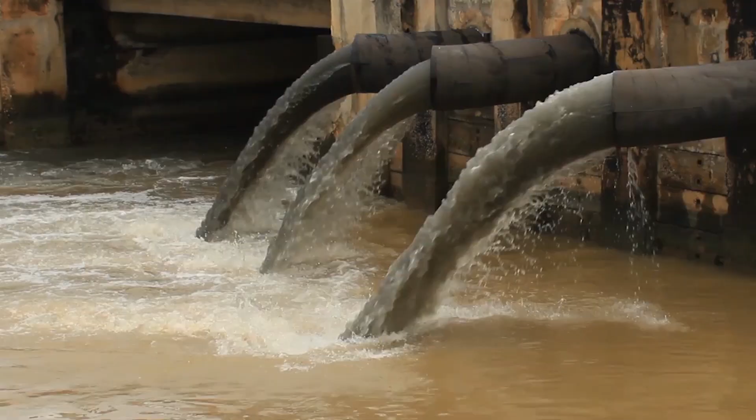Actually, I come here with some questions for you more than answers. So the reason I'm here is to ask you a few questions. The European Union is requesting many industries to measure. And actually, the goal is that they should measure in the same way, mainly because of three different

reasons. One of the reasons is because there is the emission limit value. And of course, when you measure, you want to know if the process is fulfilling the emission limit value. The second reason is that emission concentration at different times on the same site should be the same. Let's say, if I am in a process and I'm measuring 60 today, in 3 weeks, when the emission is exactly the same, the system should measure 60 as well.

And the third reason is that the emission concentration at different sites, meaning that if a plant here in Barcelona is measuring 60, and then an equal plant in Germany or in the UK or in any other place has the same emission level, it should measure 60. And my question to you is: is this goal always achieved?

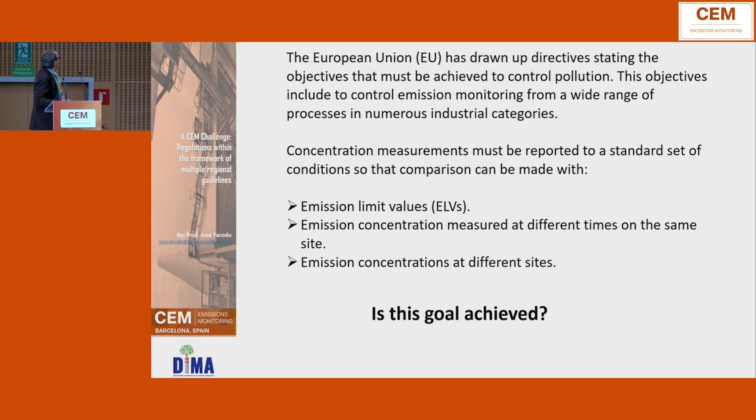Then, there are 27 CEN members, and they all have to fulfill and comply with the standards and with the directives in the same way. Do you think they do? Do you think all of them understand the standards and the directives in the same way? Do you think that a plant measuring in Barcelona, a plant measuring in the UK, and a plant measuring in Germany will measure just the same or similar?

In Spain, there are 17 autonomous communities. Do they all understand the standards in the same way? Do they use the same technical answers to measure?

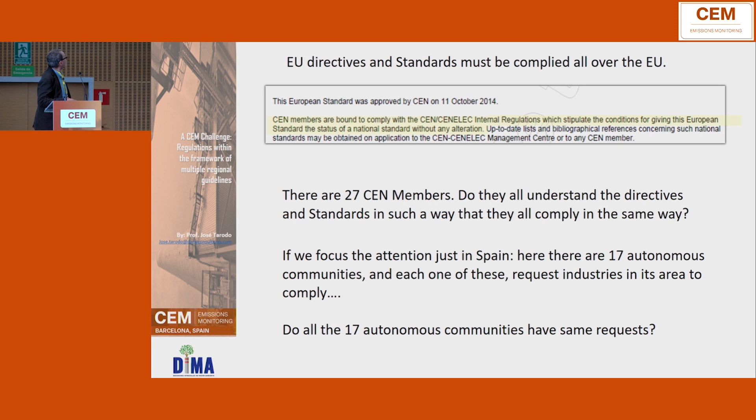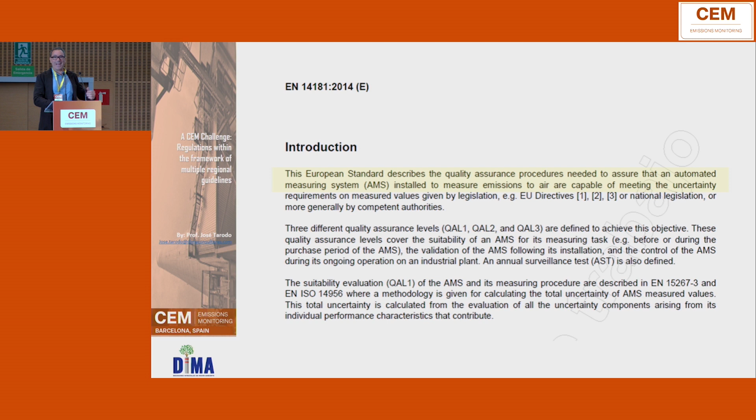Then, if we come to the EN 14181, you know there are these 3 quality assurance levels, and to me, this is a very good standard. Now, there are still open questions. And there are many guidance documents, many of them. I have here pictures of a few of these documents, but there are many more. And these documents don't always use the same answers. They don't always say the same. So if you check these documents, sometimes they tell you different solutions for the same questions.

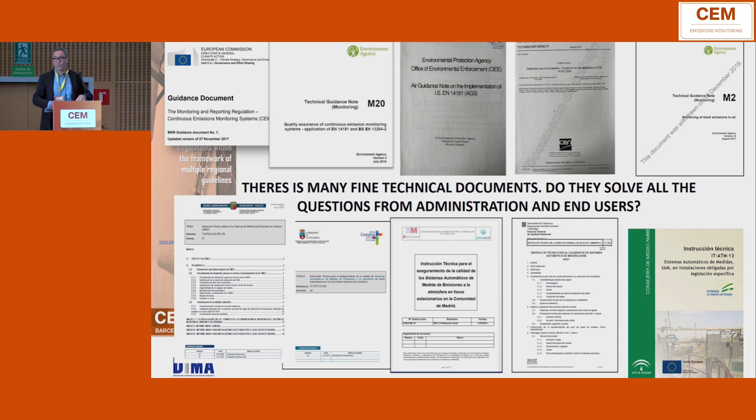A few words about me and why I'm here talking about this. I started almost 30 years ago as a project manager, doing CEM design and installations all over the world. Then 24 years ago, I started to work in a different company, DIMA Consultores, where I'm working today. My main jobs are usually design, integration, maintenance of CEM systems, and auditing, visiting plants, checking the CEM systems and telling the customer, sometimes the administration and sometimes the plant, if they fulfill, if they measure correctly, or answering their questions. And of course, I'm teaching in different engineering schools and master degrees. So this is a little bit my experience.

After visiting so many different plants, after checking the systems in so many different plants, I can see many differences between the way they measure in some places and the way they measure in other places. And since this is a 15 minutes time, I will tell you a few of them, but there are so many.

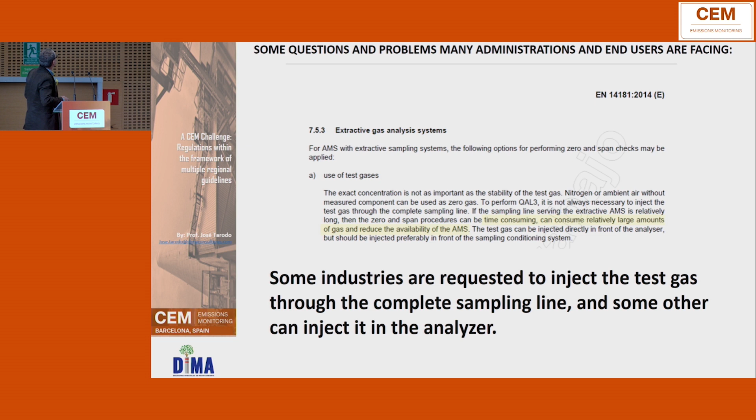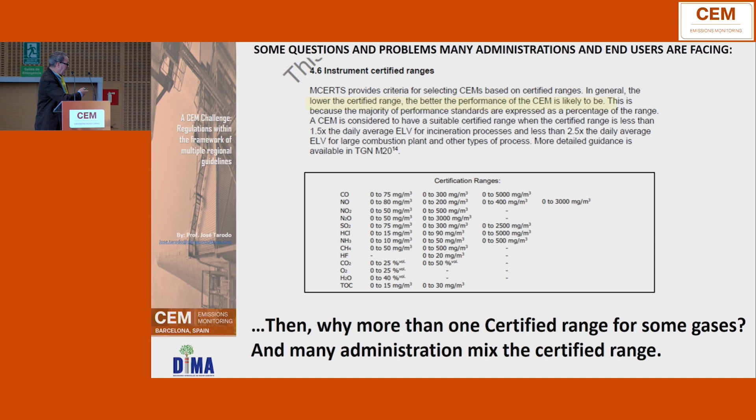Then, when we talk about the certified range, we usually say that the lower the certified range, the better the performance of the CEM. Then, why are there so many different certified ranges in the QAL1? Some customers have a lot of questions about this, and many administrations say that your emission limit value should have the certified range in the QAL1, which is totally wrong. But sometimes this happens. So many people wonder and ask about this.

Then, when we measure, we discount the uncertainty. But how to do it? Many people do it in many different ways, so there is not one way for everybody. Some people discount the uncertainty that they estimated in the QAL2. Some people discount the uncertainty that was estimated in the QAL1. Some people don't discount anything at all. An administration tells do not discount.

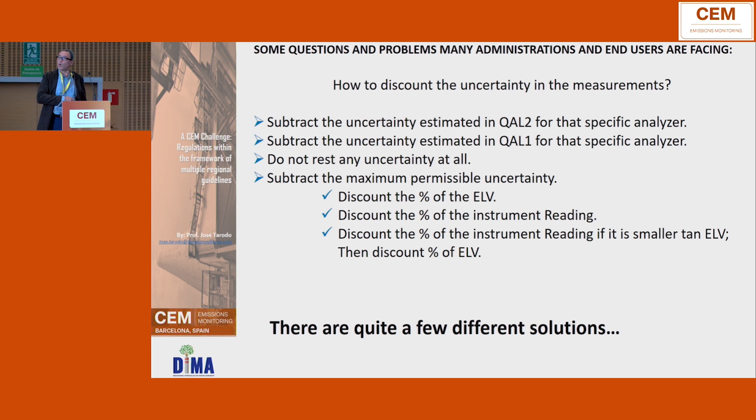Some people discount the maximum permissible, many people do, but even these people do it in different ways, not only one way. Some people discount the percentage of the ELV. Some people discount the percentage of the instrument reading. Some people discount the percentage of the instrument reading when it is smaller than the ELV, and then discount the percentage of the ELV. So many different ways. There is not only one, meaning many different results.

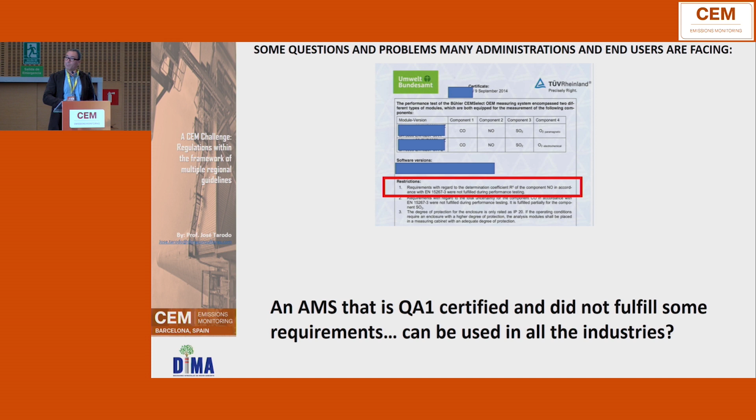Then a few questions sometimes about the QAL1. For example, sometimes you get a system which is QAL1 certified, but when you read the certification, it says that it didn't fulfill EN 15267. Today this is not really happening for new analyzers, but for existing analyzers it is still happening. Let's imagine I have an analyzer in one stack, and I have to change it to a different stack, meaning this is a new installation. Can I use this analyzer? It's certified, it's got a QAL1, but the QAL1 says it doesn't fulfill EN 15267. So many people ask about this as well.

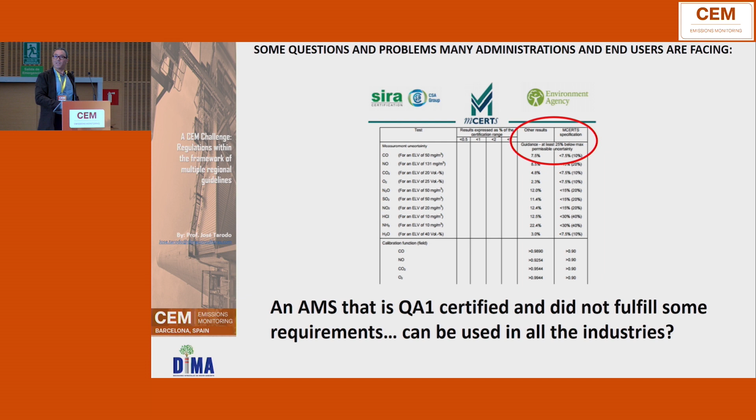Another example like this one says the requirement should be less than 7.5%, and the result is 7.5, so it doesn't fulfill. Today the new analyzer fulfills, but there are still analyzers like this in the market. Again, another one: the requirement should be 7.5 for EN 15267, for the actual regulation, and this one is 8.5. So it didn't pass, but there is a QAL1 certificate. Can we use it, or can we not use it?

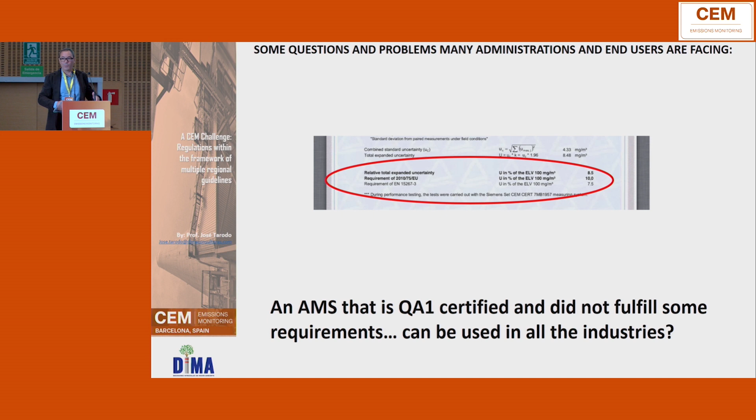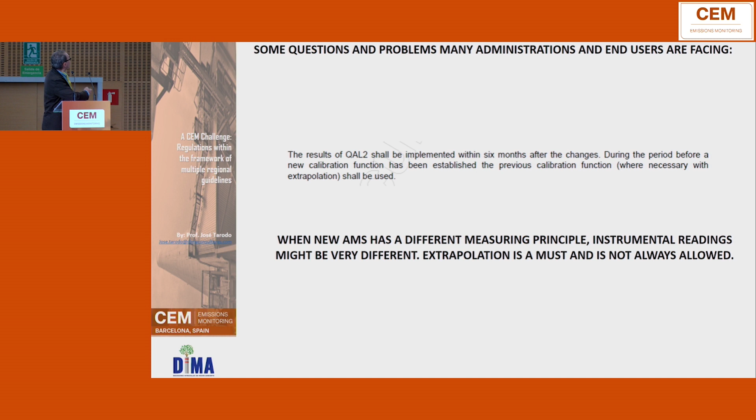Then, when you change an analyzer, you should do the calibration test and implement the calibration curve within 6 months. During these 6 months, you are supposed to use the previous calibration function, and it says, where necessary, you use extrapolation. But many people don't use extrapolation at all. If you change to an equal analyzer, I agree. But many plants change to a totally different analyzer.

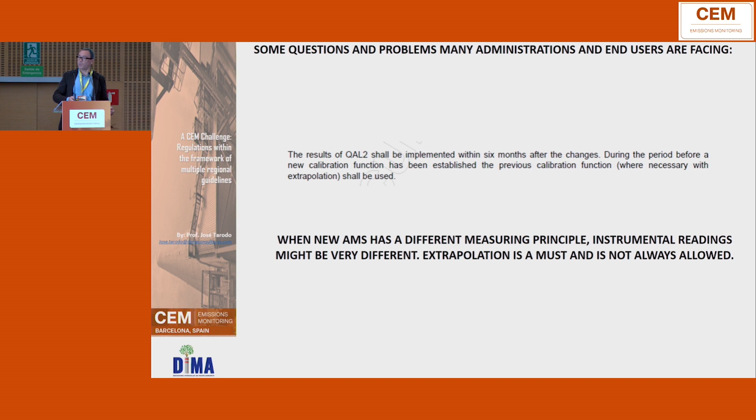Let's say you use an analyzer whose raw data is from 0 to 1,000, and then you change, and the new analyzer is from 0 to 4,000. Then the value you get is totally different. If you use the same calibration function, the data is totally wrong. You cannot stay 6 months using the same calibration numbers unless you want totally wrong data.

Sometimes the test laboratory performs linearity and response time with a reference material which is very different from the one used in the QAL1, and the results sometimes are not very good. For example, sometimes QAL1 used a bottle of dry gas, and the laboratory is using wet reference material. Sometimes it's not easy and doesn't work very well. In one of the installations, there was such a weird behavior.

The laboratory was using a wet reference, but the system was measuring totally random, and we couldn't understand. So we took the analyzer to our facilities, and it worked very similarly with the gas cylinder and with the wet generator, only if nobody was close to the wet generator. Actually, we said nobody can walk closer than 5 meters. If somebody walked closer than 5 meters to the wet generator, the analyzer measured totally random data.

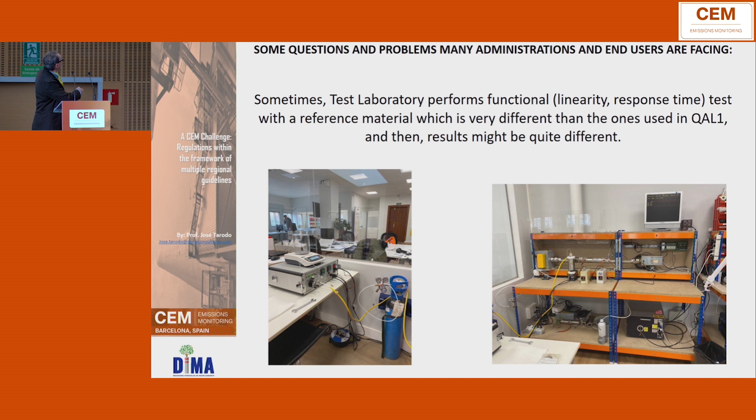Why? Because the wet generator has to weigh the mass that is being used, so whenever you walk within a 5 meter circle, the result is totally wrong. If this happens in a very stable laboratory, what is happening in a stack, where there is noise, people walking, vibration, and so on?

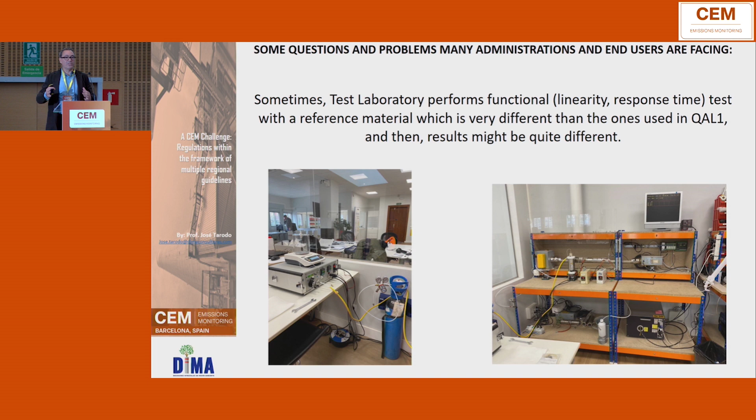Yeah, this is the test I was telling you. Then, the calibration function shall be done with the AMS conditions. This is the way it should be, but is it always done this way? Do laboratories and end users always know the way that the analyzer measures? Some analyzers measure dry or wet or normalized, and do they know? Not always.

Even sometimes in some plants. For example, I remember this plant, there were a lot of problems with the water, so maintenance people changed the installation a little bit, and they put a dryer. But the software guy didn't know, meaning that the software guy was using wet data, and it was not wet anymore, it was dry. And when we audited the plant, the calibration function, the QAL2, was totally wrong. Sometimes QAL1 is helping you, but sometimes it's not.

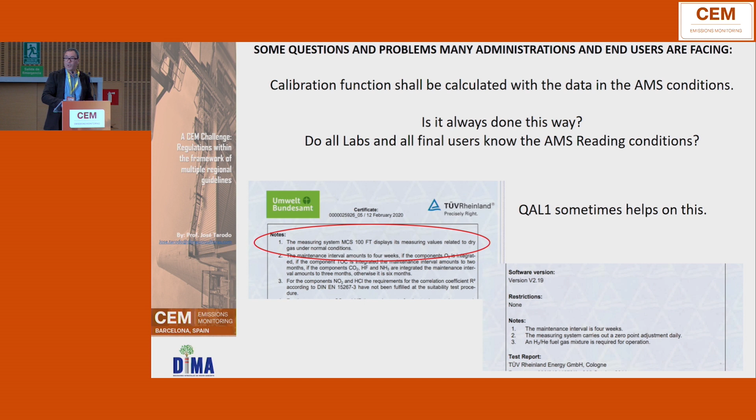Then what about when we measure water and oxygen? Some people are requested to do a calibration function, and some people don't. Some people are requested to do QAL3, and some people don't. And if you are going to do a calibration function or QAL3, you need to have an emission limit value, and you need to have an uncertainty. And then which is the uncertainty?

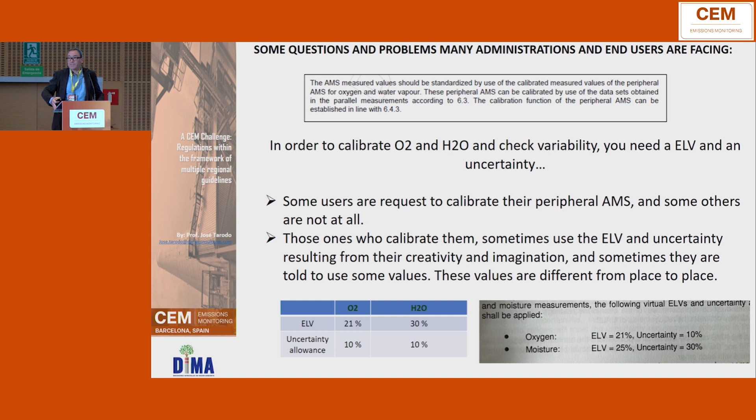Each place is telling people to use a different one. Some guides, like the Catalonia guide, say this, and I think this is the Ireland one. So there are different people saying different things. In other places, they don't say. They say, use the one you want. Then people use the one they want, and sometimes it's totally different. But I'm out of time. I will finish in 1 minute.

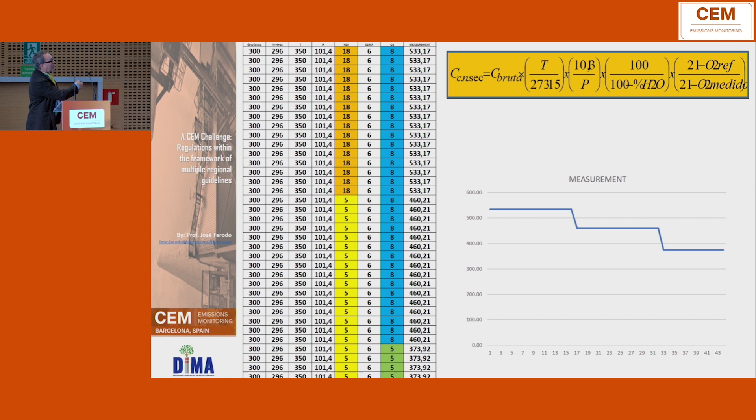This is very important because if the system is measuring 300, let's say the emission limit value is 500, then it depends on the water and the oxygen. If we have this water and oxygen, I'm at 533, so I'm over the emission limit value. But if I adjust the H2O a little bit, I come to 460. And if I adjust the oxygen a little bit, I get to 373. So I am already fulfilling the regulation.

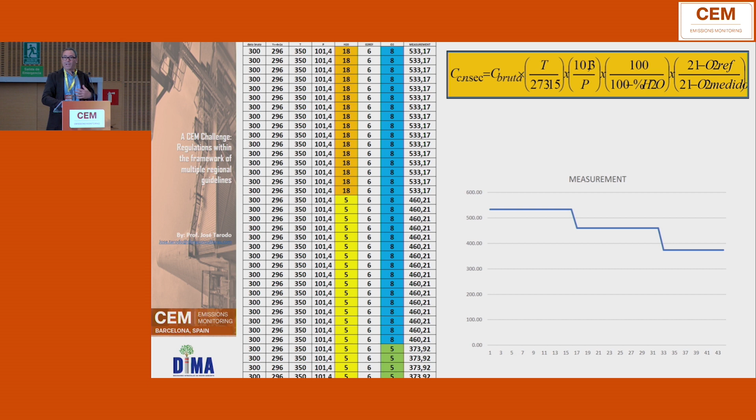I'm doing everything correct because nobody told me how to do it with the oxygen and water analyzers. It is not written how to do it. So in my plant, I can do this, and then I'm below the emission limit value. Okay.

This is maybe the last thing I'm going to say. Sometimes the parallel measurements are not the same. It's not easy to compare with the measurement. For example, when we measure HCl, what happens if the plant is using NH3? Can you play the video, please?

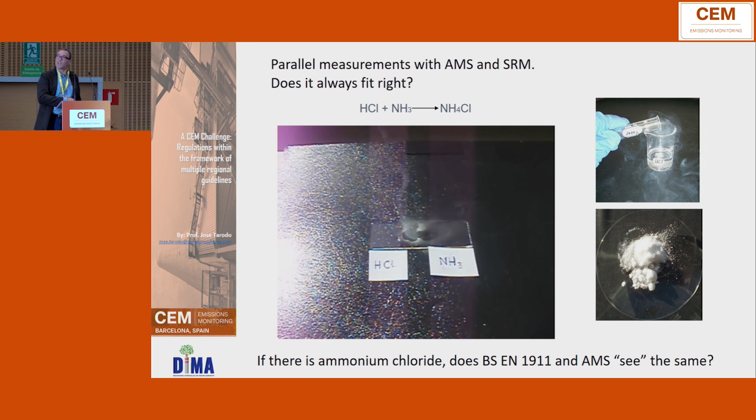Okay, this is the last one. In this place, the QAL3 was done to the analyzer, with very good results, but the sulfur was staying in the line, and at the end, the sulfur totally blocked the line. So no line at all, no measuring at all, but QAL3 was really good. And the customer was very happy.

I have very low measurements right now. Of course you have very low measurements. And my QAL3 is very good. Yeah, but you are not measuring at all because everything is blocked, okay? So how to solve this? If you put the calibration gas up in the stack, you would know that QAL3 is totally wrong. But if you put it in the analyzer, QAL3 is right.

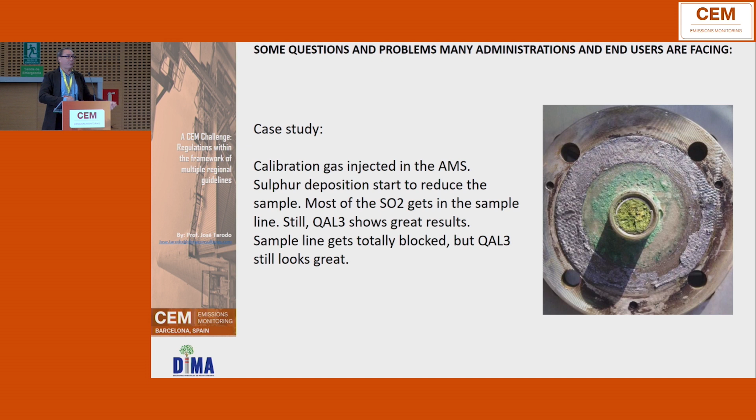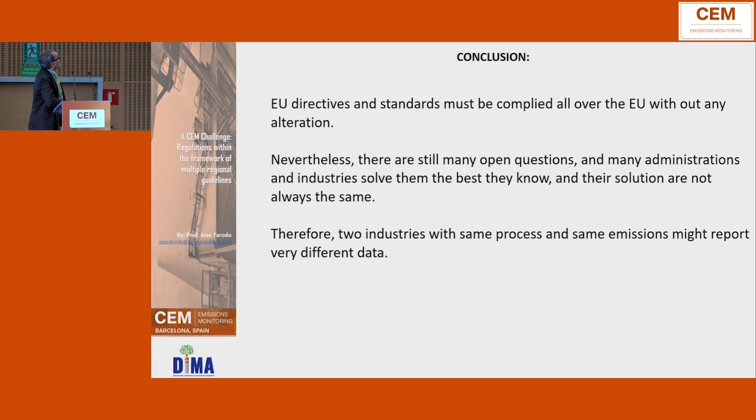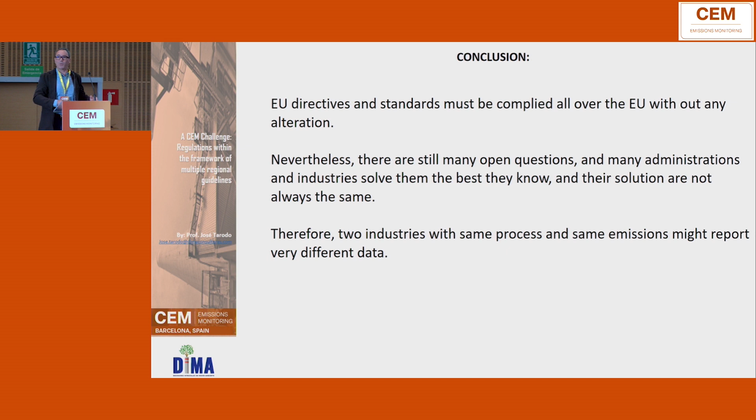Okay, so conclusion. EU directives and standards must be complied with all over Europe without any alteration, but sometimes this is not happening. People are working hard and very well, but we still need to adjust a few things because results are sometimes not comparable from one place to another.